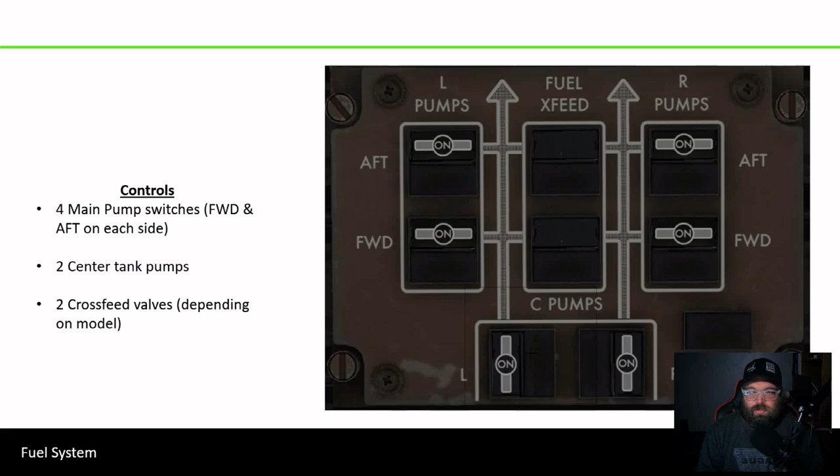Okay, so that's just a quick rundown of the controls. Now let's take a look at some of the lights that are on those controls. So the lights are going to be pressure lights and valve lights and a fuel config.

Notice there are main pump pressure lights that are going to be on there. Those pressure lights are low pump pressure. That's pretty self-explanatory, right? Most of any of these, when you see a pressure light, it's never a good thing. It usually means that it's low pressure, unless we're talking about the RAT. But we're not. We're talking about fuel pumps.

Now, we start talking about center tank pumps. Center tank pumps have pressure lights as well. And the pressure lights on the center tank pumps are a little bit different than the main tank pressure lights. And the reason I say they're different is if we think about how we operate the panel itself.

If I take off with a full fuel load, then all of my pumps are on and running. My center pumps are on, my main tank pumps are on, everything's running, and that's golden. I run out of center tank fuel first, and I'll talk about why in just a second, but when that happens, what do I do with those pump switches? Right, I turn them off. So when I turn them off, it is a normal condition for the center tank pumps to be off.

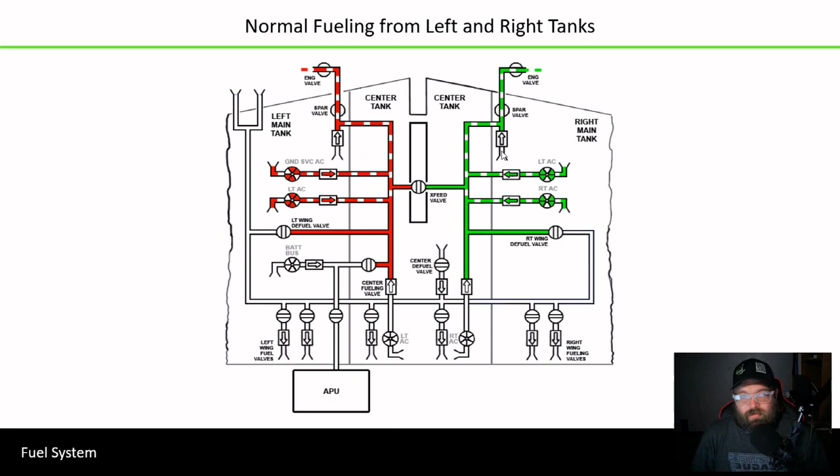So anyway, this is normal fueling with the left and right tanks feeding the engines, meaning I have no center tank fuel. Now, if I look at what happens when I have center tank fuel - I have to burn it first, and we'll talk about why in just a minute. It's basically for structural integrity, but I'll explain it a little bit better in a second.

But the center tank pumps have to operate first to burn out that fuel. So what happens? Well, they override the left and right main tank pumps. So I have my left and right mains feeding, and we're looking at that here - left and right main tanks feeding perfectly fine. I turn on my center tank pumps, and this is what it looks like.

Because the center tank pumps operate at approximately double the pressure of my main tank pumps - remember this, numbers don't matter, but it's about 15 psi for the main tanks and 30 psi for the center tanks. Does that matter to you as a pilot trying to learn this airplane? Not really. The biggest thing to remember is that it's double the pressure, or approximately double. Therefore, the center tank pumps are considered override pumps. Being override pumps is really the biggest thing to remember here.

Now notice that they are provided power from the left and right AC, respectively, to the left center tank and the right center tank pump. So they are located there, and you'll notice that it's feeding both engines.

Once the center tank runs out and the pumps have been turned off, then my right and left main tanks would take over. Actually, you wouldn't even have to turn the center tank pumps off - you would just have to simply lose pressure in the center tank pumps for the left and right ACs, left and right tanks, to take over and provide that fuel pressure.

Now, let's say that I go out to a cold, dark airplane. I don't have a power cart, I don't have anything like that, so I have to start the APU. Well, how can I start the APU if I don't have AC power on the airplane? Because everything here tells me that I need AC power. I need AC power here, here, and here. So how do I do it?

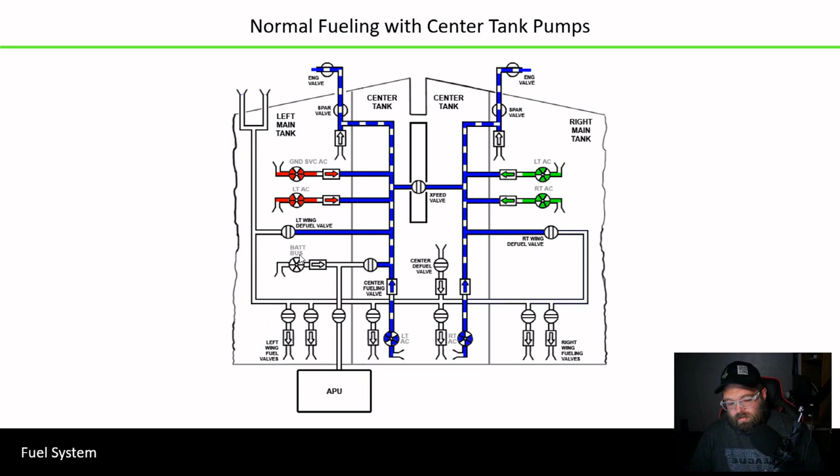Right here, you'll notice this pump. This extra little pump in the left main tank says battery bus. Now, the important thing to remember here is I have to turn on my battery bus to be able to get this thing to run. See my electrics brief. But when it does run, this is what happens.

So I come out to a cold, dark airplane. I go through my safety checks and whatever. I hit my battery power switch on. Then I go to start my APU. When I go to start the APU, that DC pump turns on and starts to run and provide fuel to the APU, and it will continue to burn until AC power is added to the airplane.

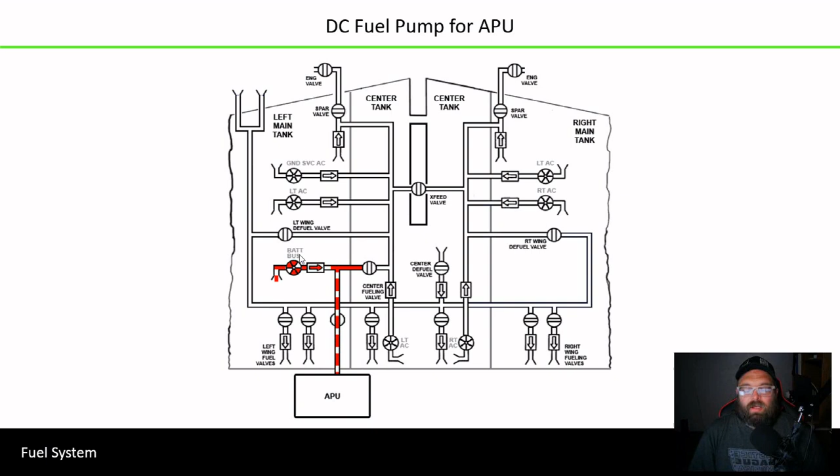Once AC power is available and added to the airplane, my left forward AC pump ends up taking over. When it takes over, there is no way to turn this pump off. I can push that switch all day long and nothing will happen, as long as that APU is requesting fuel and does not have a shutdown signal.

Basically, the APU is somewhat self-sustained when it comes to fuel, because it can either get it from the battery bus through the DC pump, or it can get it through my left AC or right AC through the ground service when AC power is actually applied to the airplane. Either way, the APU will get its fuel.

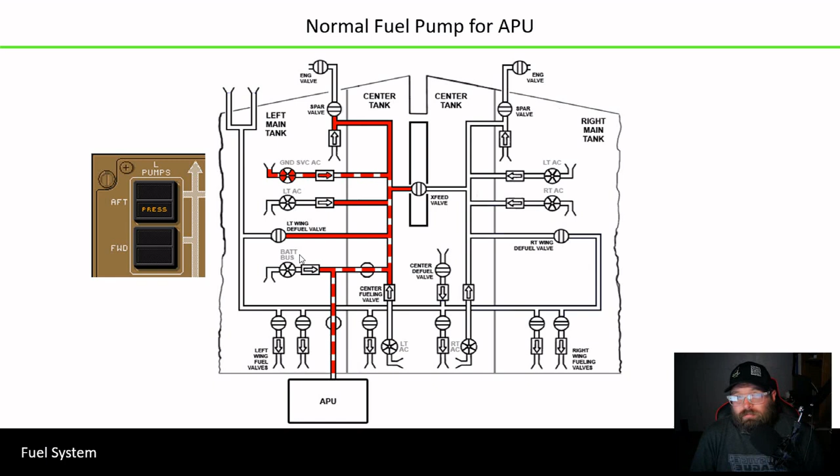Another light that was on that panel is the fuel config. The fuel config light is one of those things where it has multiple reasons that it turns on. As you can see here, there are three reasons for it to illuminate: it could be an imbalance, it could be low fuel, and it could be the center pumps off with less than 1,200 pounds of fuel in the center tank.

Now, obviously, imbalance and low fuel are pretty generic terms, because imbalance could be anything - 1 pound, 2 pounds, 1,000 pounds, 1,500 pounds, whatever. That's not what we're talking about. There is a sliding scale. Generally, it is put into the performance part of your QRH. Again, follow your company policy, follow your company manuals for where this is located, if you even have it.

As pilots trying to learn this airplane, or just people that want a general understanding of it, the imbalance is very simple. It is 2,000 pounds plus or minus 500, meaning the range for an imbalance can be between 1,500 pounds and 2,500 pounds. That's your range, 15 to 25. The reason that varies so much is because it's all determined upon weight - how much fuel do you have, how heavy is the airplane. The heavier the airplane, the smaller that variance can be, the smaller that imbalance can be.

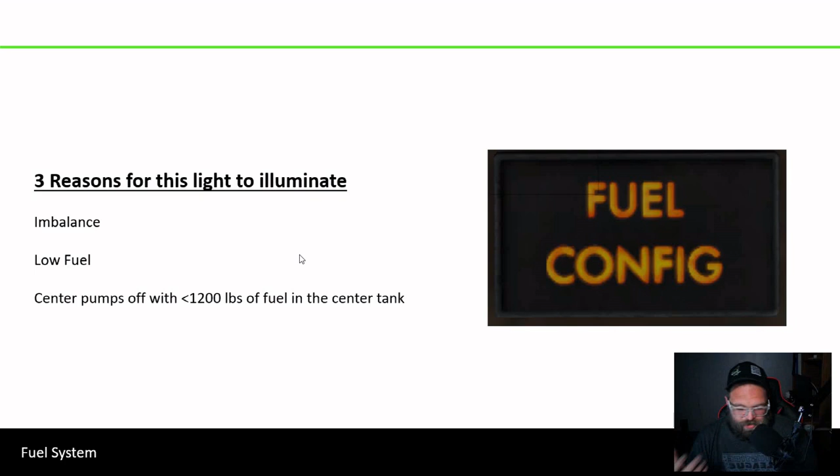And again, if you're looking at this, you either don't care about the four forces of aerodynamics, or you're a pilot far enough along in your career where you've been beat over the head with that. So I'm not going to go into that so much. Just talking simply about why it's a good idea, or why they recommend, or give a policy that

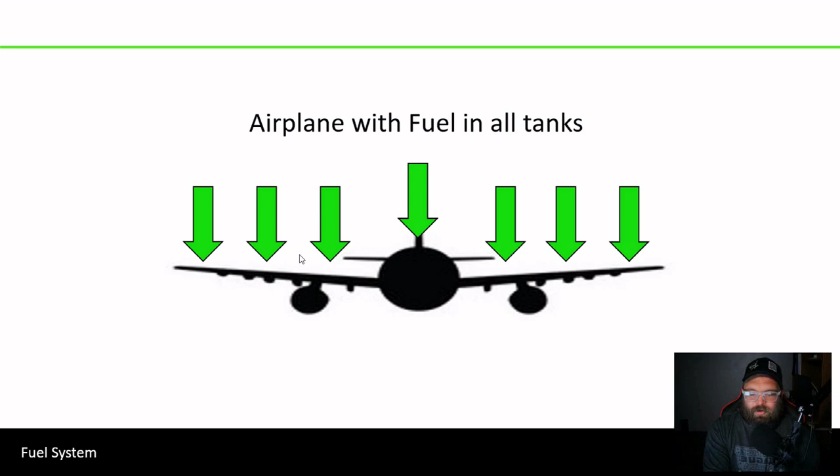says you will burn center tank fuel first. Because if we look at this, okay, cool, I got fuel in every tank, all the weight's getting pushed down in that direction. So then I burn center tank fuel like I'm supposed to. So now my center tank would essentially be trying to push up, but I have all this additional weight on my wings that's keeping it down, right?

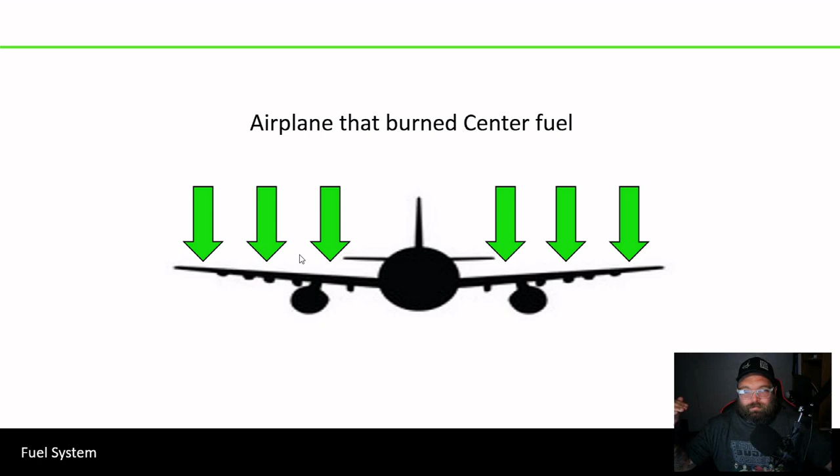Now, if we do it the opposite way, so I burn wing tank fuel first and I keep my center tank fuel - well, my center tank can hold 80,000 pounds approximately. It's like 79,000 and some change, but we'll just say 80,000 pounds for easy math. So 80,000 pounds can be held in the middle of this thing, and it's pushing down, pushing down, pushing down.

My wings are empty. So all I have is the weight of the sheet metal, the composite material, and the engines out there. So you can imagine, and I'm terrible at animating this on PowerPoint, but if you look like this, all of a sudden my wings start to get that additional pressure on them, because my center is trying to pull it down, and my wings just don't have the weight anymore. So I'm putting all this undue stress on the wing roots.

Again, I'm not saying that if I burn the center tank, or if I don't burn the center tank and burn the wings first, the airplane is just going to fold up. That's not what I'm saying. I'm just saying you're putting undue stress on an aircraft that's already kind of old and beat up to begin with. Especially when you're getting into some of these cargo airplanes where they already have 95, 100,000 hours with who knows how many cycles on them. The least amount of stress you can give them, the better. So, just want to throw that out.

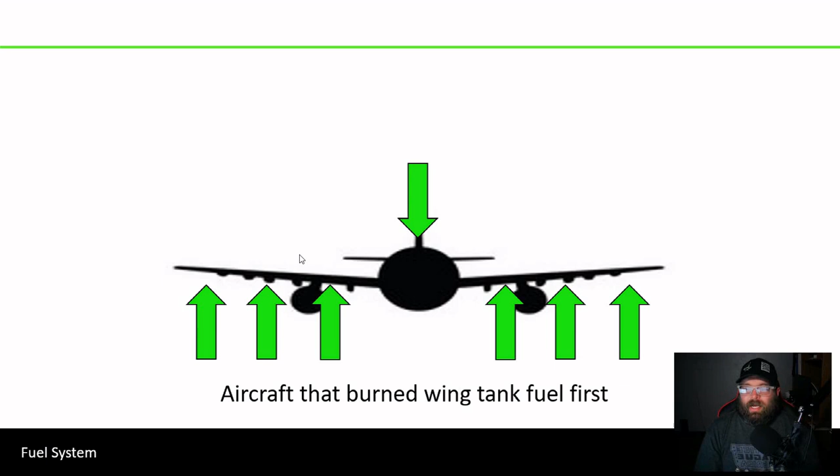Now, the other thing your fuel system could have is a fuel jettison system. Fuel jettison systems are one of those things where they're helpful, kinda, but in my opinion, they don't really do enough for it to matter. Let me explain that.

Fuel jettison systems have nozzles at the end of each wing, probably a foot and a half long, something like that. And yeah, they can get rid of a good bit of fuel in a short amount of time. However, they can only get rid of 2,600 pounds per minute. And I say only because it's 2,600 pounds per minute for a tank that's 80,000 pounds, since it all comes from the center tank. So if the center tank's 100% full at 80,000 pounds, and I do 2,600 pounds per minute - let me do some quick math - 80,000 divided by 2,600, that's a half hour. A half hour to empty my center tank.

Now, when would I want to use fuel jettison, do you think? Probably when I am heavy and I'm trying to stay away from the ground by lightening myself up, which 2,600 pounds a minute, sure, that will lighten you up. Will it lighten you up enough?

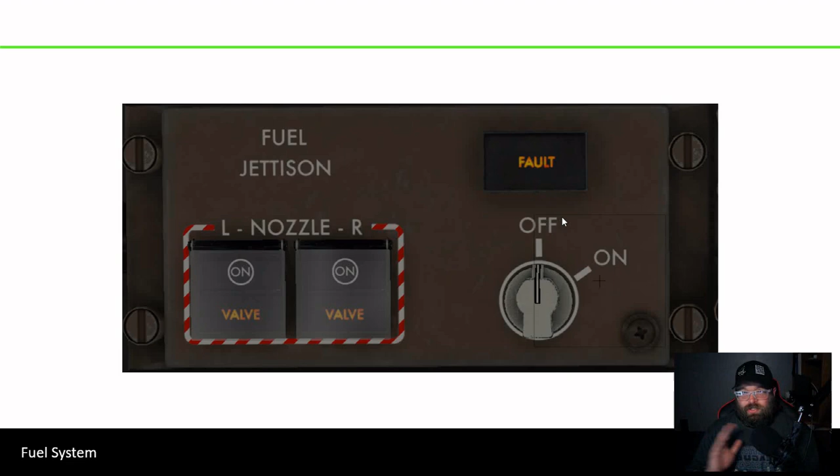These are numbers given to you by probes throughout the airplane, with the exception of the total quantity. The total quantity isn't necessarily taking all the fuel probe numbers and adding them up. Most of the time it's going to match, however, the total quantity actually comes from a separate fuel calculation that comes from the fuel quantity processor, or the FQP.

Basically, all the information from the airplane goes into that FQP, and it does some math that is way beyond my knowledge, and basically accounts for temperature, altitude, pressure altitude, all that kind of stuff, and says here's your quantity. And that's where that number comes from.

So the biggest thing is, if someone ever asks you where total quantity comes from: fuel quantity processor. Okay, three words, it's real easy.

Beside there, I've got my fuel temperature, that's in degrees Celsius. There are two numbers that we concern ourselves with when it comes to the fuel temperature, and there are some limitations that come along with it. We have a low temp, and we have a max temp.

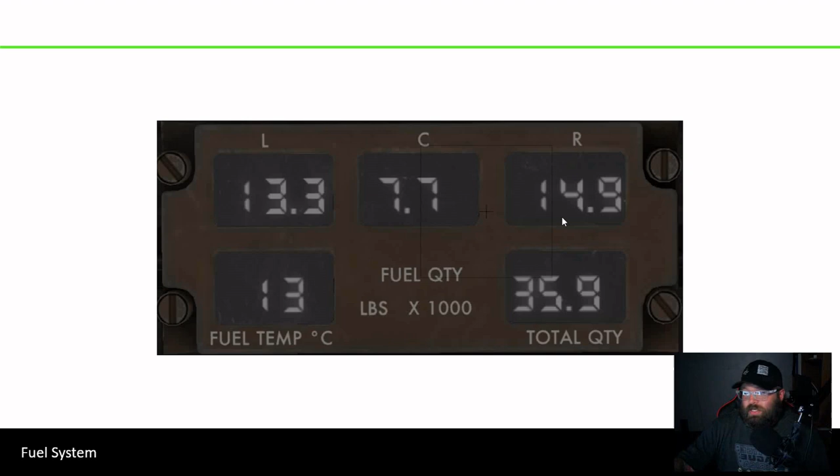I only have 3 hydraulic systems, so how can I evenly disperse them? My thinking would be to put one in each tank, since I've got 3 tanks. No, Boeing didn't do that, of course. They did 2 in the right tank and 1 in the left tank. So because I have 2 hydraulic heat exchangers on the right side, they assume that temperature is going to be higher than in the left tank. The left tank will be the cold tank because it only has 1 heat exchanger versus 2. So that's where the temperature is taken from, because it's assumed to be the coldest tank.

If you have ever flown the 7.5, or are interested in learning the 7.5, the 7.6 is the exact opposite. There's 2 in the left wing, 1 in the right wing. Why they did that, I don't know. But they made enough differences between the 7.5 and 7.6 to make it really annoying, but not enough to make it a different type rating.

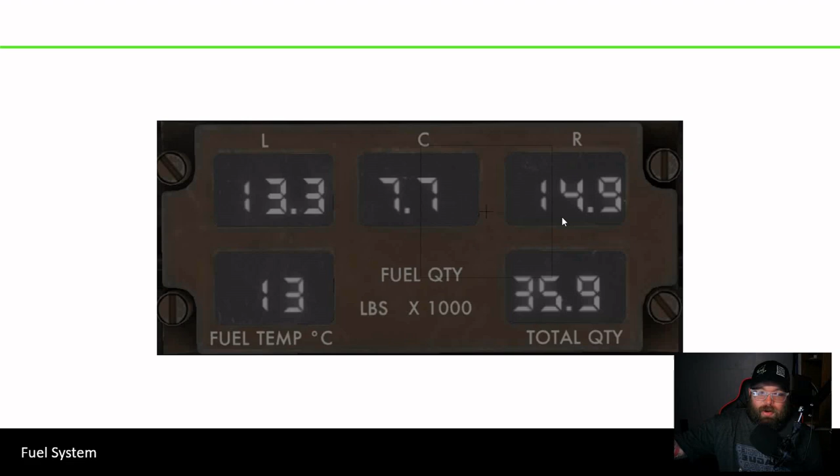So hydraulic coolers are why the temperature is taken in the left wing. There are 2 in the right wing, 1 in the left wing, so it's assumed to be colder. All right.

Now this is how much the aircraft can hold. If you're coming from a 7.3 into a 7.6, 7.3s can hold somewhere around 40,000 pounds of fuel, depending on the variation. This is for a 300, by the way, a 7.6 300. The 7.6 200 isn't quite this much, a little bit less. But the 300 can hold 79,730 pounds in the center tank, so it can hold just about twice as much fuel in the center tank as a 7.3 can hold in it completely.

So if you're coming from a smaller airplane into this airplane, it is quite a difference when you get into weight and how much things weigh. Left and right main tanks can hold 40,267 pounds each, for a total of 160,264 pounds. Obviously most of the time these airplanes aren't loaded to that capacity. Plus with their age and stuff, I don't know if I'd want to go to that capacity.

But it's nothing to see 110, 120, 130,000 pound fuel loads when you're talking about going overseas, because this airplane burns roughly 8 to 10,000 pounds per hour.